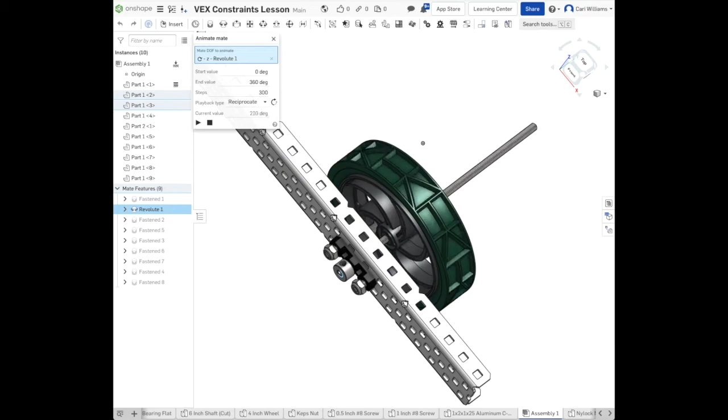Today's lesson is all about constraints, and by the end of the lesson, your goal is to make a wheel that rotates on an axle through the holes of both the bearing flat and the aluminum bar, as shown in this image. All right, let's get started.

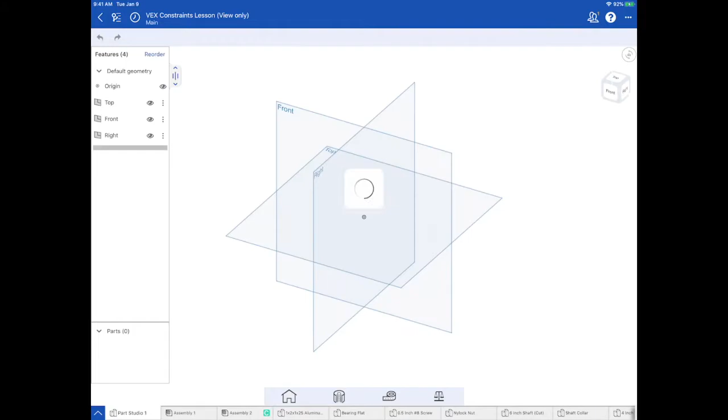In this video, I'm going to show you how to use the OnShape iPad app to do our first lesson on constraints. In your home menu, you'll see everything you've ever created or opened in My OnShape. But in Shared With Me, you'll find the document I've shared with you that has some part files already inserted, as well as an assembly file I made for you to explore. You'll see this is a part studio, which is how we create a part, but we're not going to do that since I've already imported the parts for you. This is an assembly file, and if you look at the bottom tab, you'll see this is where parts are put together.

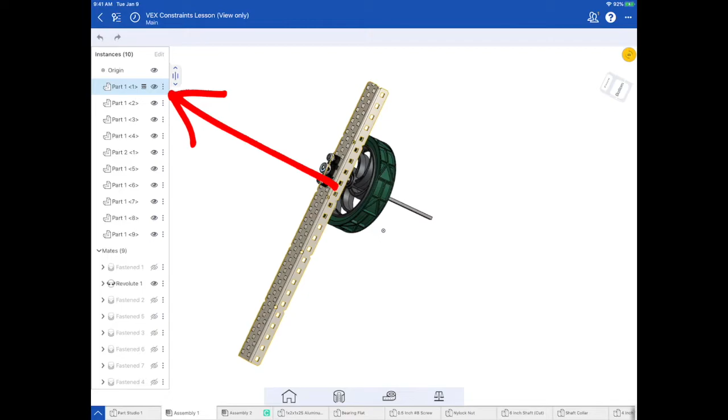Along the left side, you can see each part individually, and when I tap on it, it highlights. If I tap on two, it'll highlight two parts. Watch as I highlight this—that's the drive shaft or axle. Now the next one—that's the outer part of the wheel. The next one is the inner part of the wheel. This one is the shaft collar; let me zoom in so you can see it better. That's on the end of the axle. As I scroll through and highlight each one, I tap it and then tap again to deselect. Sometimes you can select two at a time, so I can highlight one and two and see both parts highlighted together, the screw and the nut.

Below the parts, you'll see the mates. Mates are the way parts are constrained together, meaning basically glued together, or how they interact with one another. As I tap on the mates, you can see which parts are constrained together. Each one has a different name, and I'm going to go through those as we build our lesson one. You can see the two parts constrained together in each of these mates along the left side menu.

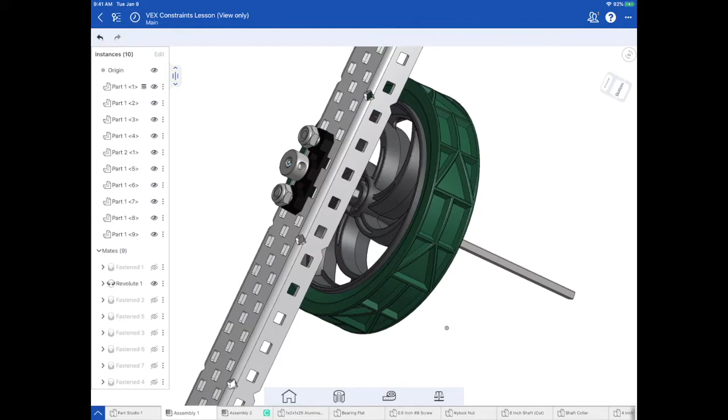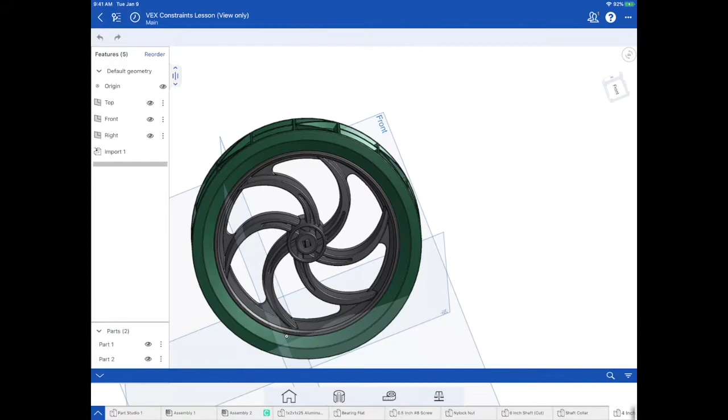One thing I want to point out is this little caret arrow in the bottom left corner. This can expand your files along the bottom of your screen so you can see a preview of the different assembly or part files. Here they've loaded right here—you can see we have an aluminum bar, a bearing flat, a screw, a nut. I'm going to go through these as we build our assembly.

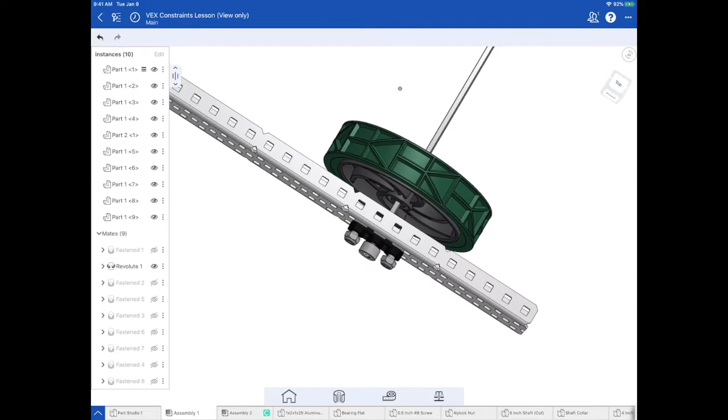To make an assembly, you're going to create a new assembly file that's blank, and try to create what I made in this assembly file that I shared with you. All of the part files have already been imported for you, and since I shared the document, you don't need to import them—they're already here, and you don't need to create them. However, you will insert these part files into an assembly file to make what you see right here.

This shared document is view only, meaning you can't edit anything, so you'll need to make a copy. Tap the little 'i' in the far right, and you'll see there's an option for copy. Now that you've made a copy, you'll name it—you can leave it with the suggested name with 'copy,' or name it something specific for your purposes. Then you'll see this is an editable copy that you can create a new assembly file with.

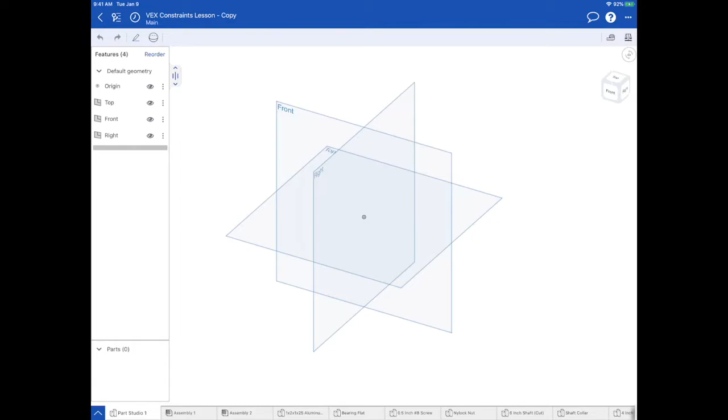To do this, tap that blue caret arrow in the bottom left corner and then tap the plus sign. That will bring up a menu where you can tap Create Assembly.

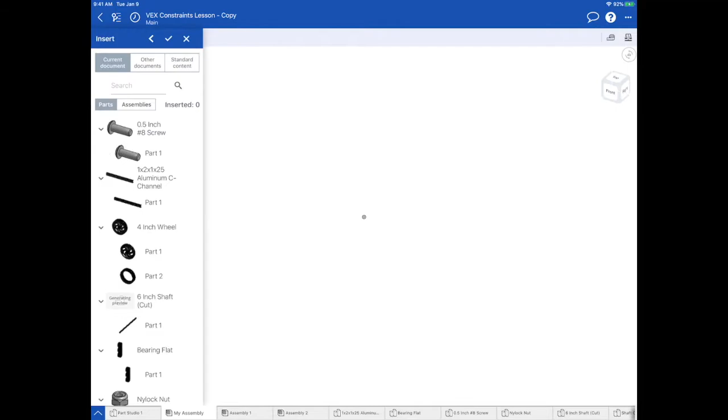Now you have a blank assembly that you can start inserting the different part files into and putting them together. To do this, tap the Insert icon in the top left corner, and a menu will appear where I select which part I want—the first one's going to be this aluminum C channel. Then I tap the check to accept.

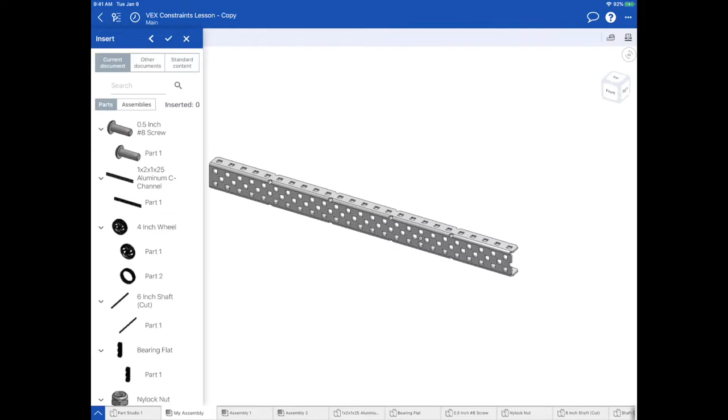Now we're going to insert the second part, which is the bearing flat. We'll go back to the Insert menu at the top left, tap the Insert icon, and select the bearing flat. Then tap the check mark to accept, and you'll see the bearing flat added to the workspace.

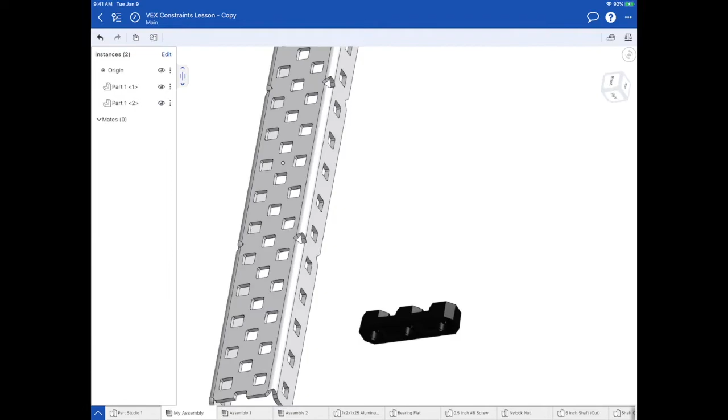Now I'm going to move that bearing flat over a little bit, and you can see we have two different parts here that we want to basically glue together, and we're going to use what's called the fastened mate. There are many different types of constraints found in this features menu up at the top left.

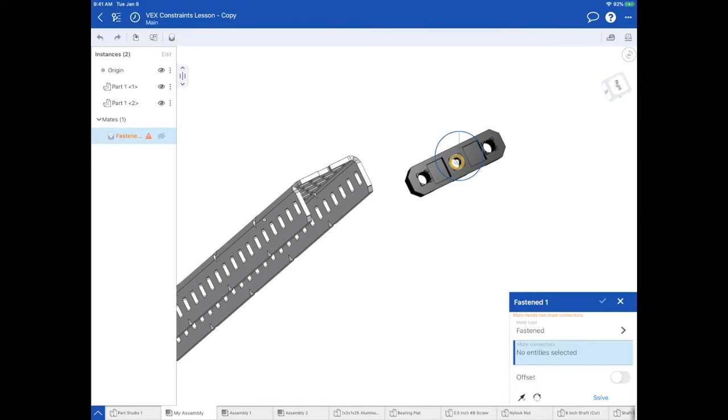So when I tap on the features menu, you will see that we're going to select the fastened mate. The fastened mate basically glues two pieces together so that they may not rotate on an axis. They're stuck together. So when you use the constraints or the different types of mates, you will need to use the selection tool when you're on an iPad. In order to do this, you hold your finger down on the white space and then you drag your finger over to the point on the part that you're trying to select.

Let me share a part of the tutorial number 1 for the iPad that better explains how to use the selection tool that you're seeing on the screen right now. Another important gesture for using OnShape is the precision selector. To select things precisely, you'll want to tap and hold with a single finger. After holding for a moment, you'll see the precision selector appear. While holding your finger down, simply move over the entity that you're trying to select and let go. The precision selector is used throughout OnShape anytime precision selection is needed.

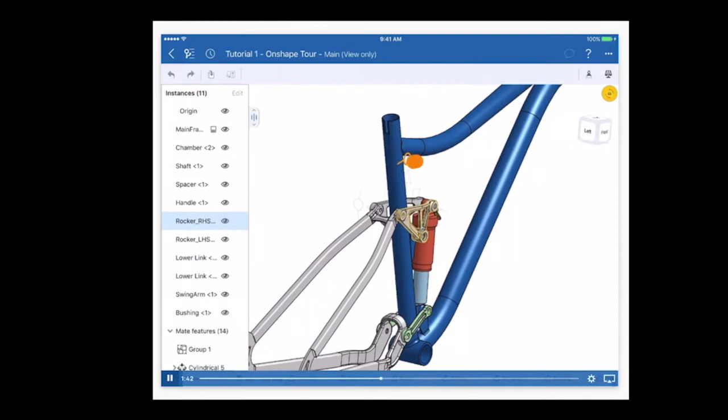One last important gesture when using OnShape Mobile is the double tap. Double tapping the screen with a single finger will deselect any entities that are selected. Don't forget that when too many things get selected, just double tap the white space on your screen with a single finger and it will deselect everything. You're going to need this all the time when using the iPad.

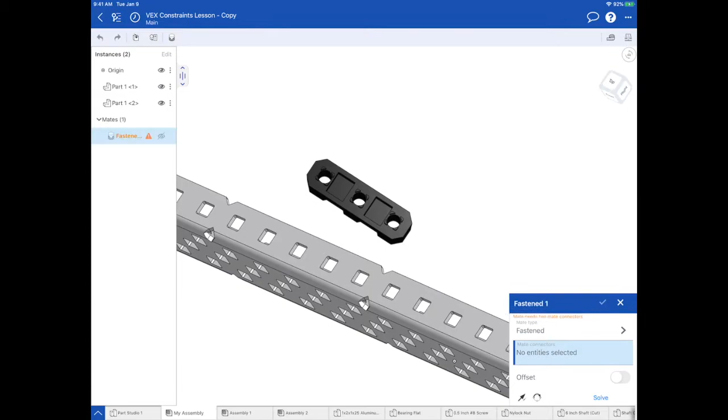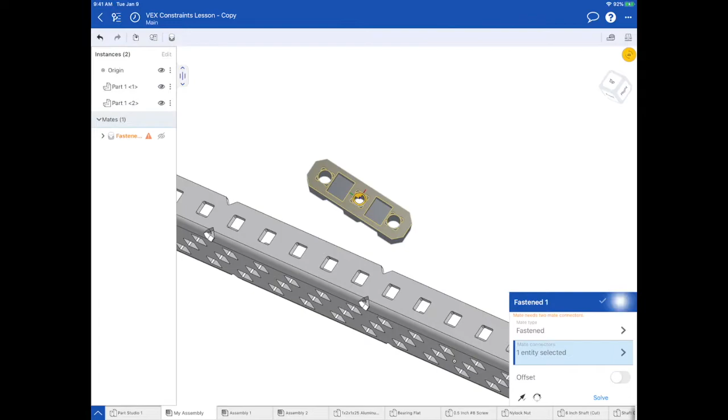Okay, so here we're going to try this again. We're going to the constraints menu and I select the fastened mate. Then I use my selection tool and notice that there's a variety of points I can choose. I'm looking for the top portion of that center circle. Now notice when I select a point, in the properties box for the fastened mate, it says one entity selected. Now one thing I found difficult to do on the iPad when selecting 2 points to mate together is to rotate once that properties box is open.

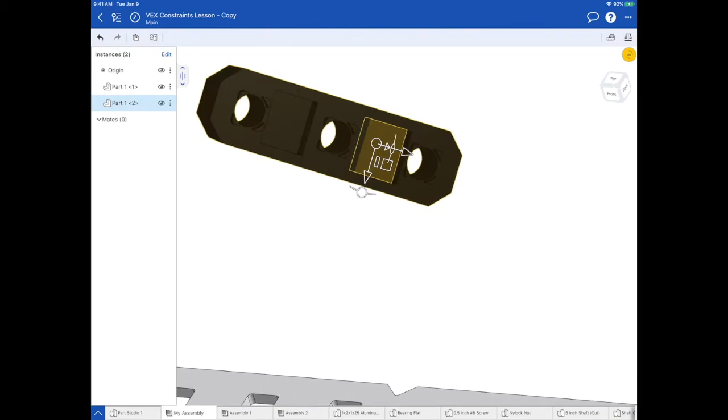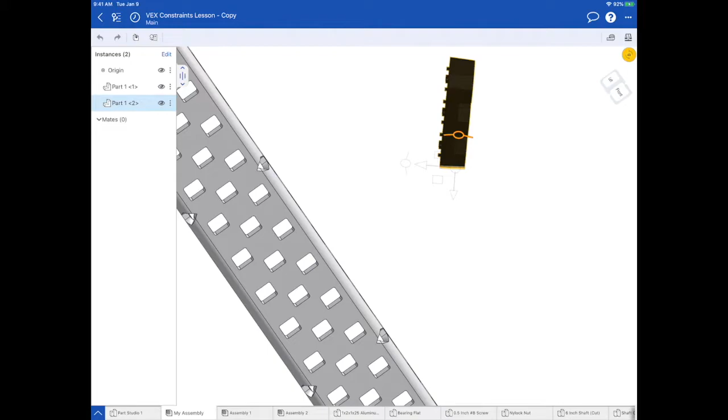So you'll see what I'm doing here is I'm trying to rotate that bearing flat so that the back side is showing as well as the front side of the aluminum bar, which is what I want to fasten it to. So I'm really trying to use those arrows and those little dots at the end of the arrows. That's how you rotate the parts. It takes a little bit of practice to get used to this, but I'm trying to rotate that bearing flat so that the back side is visible as well as the front side of the aluminum bar, because that's what I'm trying to fasten together. So notice it's taking me some time to figure out how to do this, but I'm rotating that bearing flat around so that I can fasten the 2 points together.

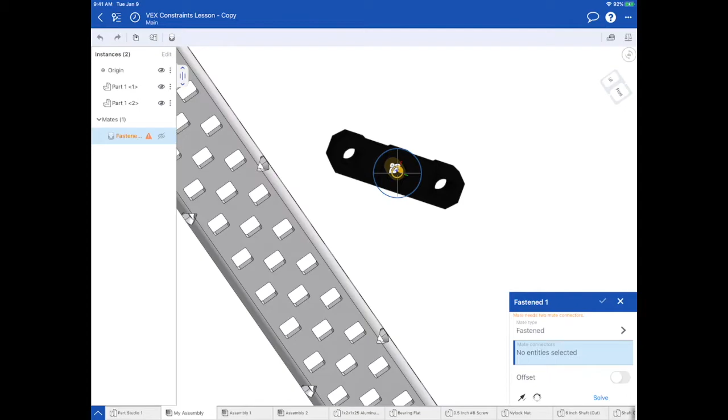So now that I can see the 2 points, I'm going to open that features menu again and click on Fasten Mate. Then I'm going to use my selection tool to select that top side of that circle. Notice there's a bottom and top of the circle. I selected the top of the circle. Now I'm going to the aluminum bar and I'm going to select the circle inside the middle of one of those holes in the aluminum bar.

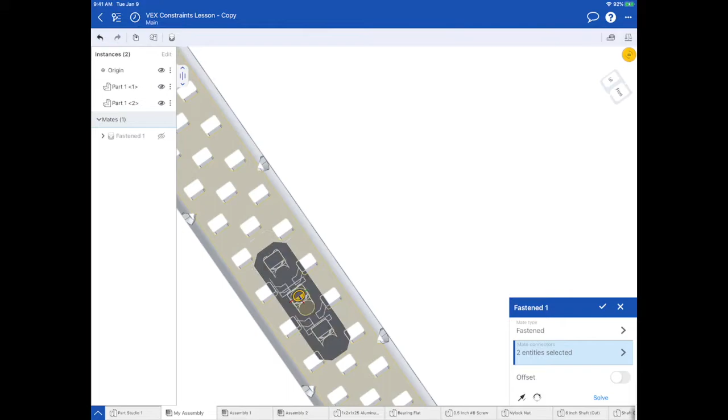Now look at the fastener mate property box. You can see that 2 entities are selected, and there are a couple settings that I like to play with to make sure I have the right rotation and right axes that I've picked. So just click that arrow and that circle at the bottom of the properties box and it will kind of show you the different configurations for those 2 points you've selected. All right, once you think it's right, tap the check mark to accept, and it looks like our bearing flat is now fastened to the aluminum bar.

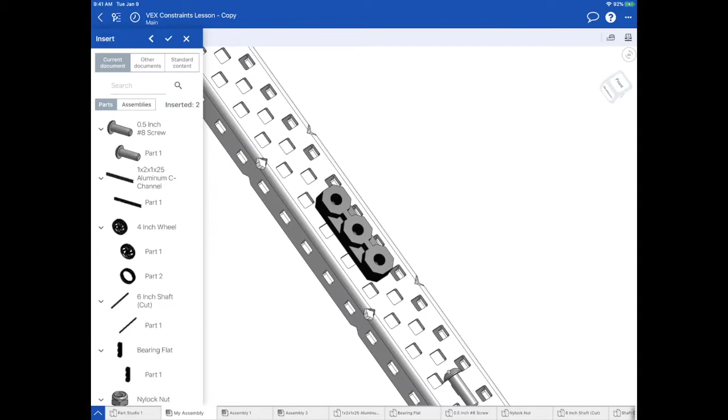Okay, now it's time to insert our next part. You're going to go up to the Insert menu, and then you're going to select a screw. We're going to tap the screw and then tap the check mark at the top to accept, and notice that a screw has been placed in our workspace. It's actually on the aluminum bar. So I'm going to move it off of the aluminum bar so I can see it.

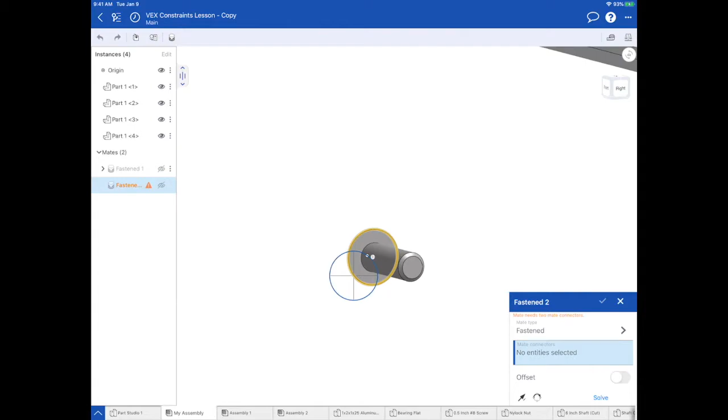And now I'm going to go up to the Features menu to choose the Fastener Mate again. And this time I'm going to use the back side of the head of the screw. So I use the selection tool. And notice once it's highlighted, or there's several selection points, you can tell by those little white dots. Once I found the white dot I want to tap on that.

So I'm selecting that center point of the top head of the screw. Now, I think I can select the center part of the hole of the bearing flat without rotating. If you aren't able to, you're going to have to close out this mate and then redo it. And I have to do that many times to learn this program.

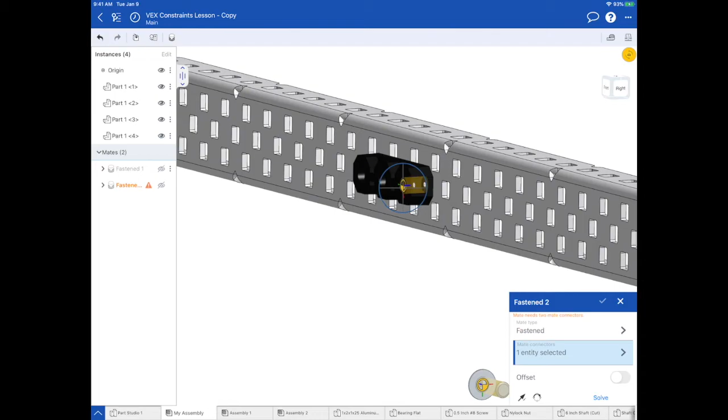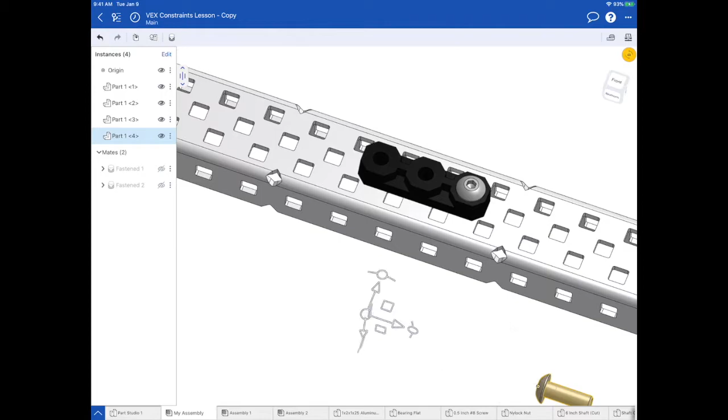So I select the center point of that right hole and I use my little adjustments, the arrow and the circle in the properties menu, and I can see that I want the screw facing that way and I hit accept. Now, one thing that I had to learn is that if it doesn't say in your properties menu that you've selected an entity, then you need to make sure that you do that. So you need to tap on that little white dot to select the entity.

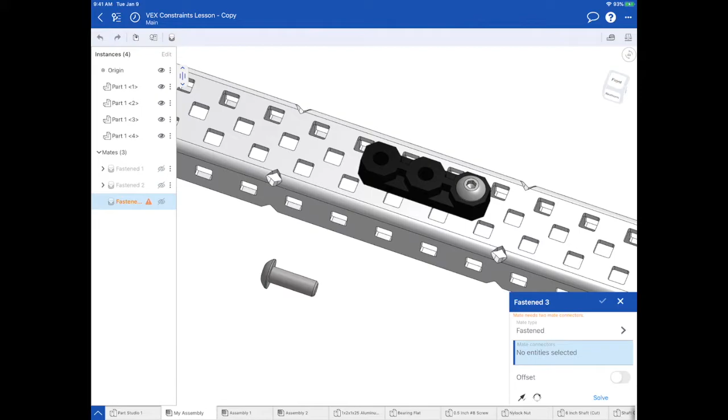Let's try this again. I inserted another screw, and now I'm going to use that fastened mate. So once again, I tap on the features icon and then the fastened mate. And now my properties window opens, so I need to select my first entity. I'm going to use the back of the head of the screw, that center point. So I'm going to use my selection tool, come over, and then tap that little white dot.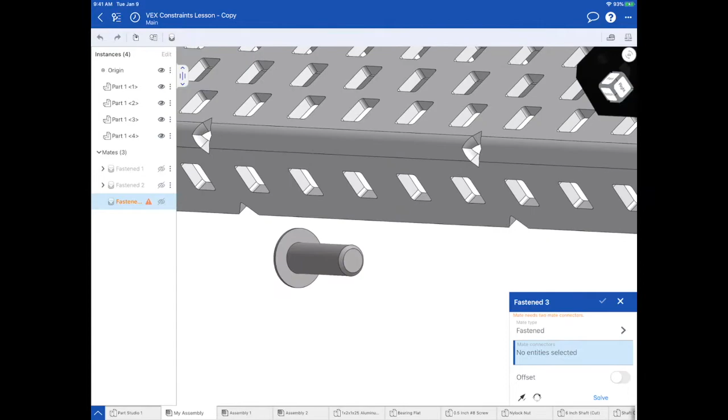Notice it doesn't say any entities are selected yet. I got to make sure I can get it to do that. So I'm going to tap that little white dot in the center. Sometimes zooming in helps. And notice once I select it and I tap on that white dot, it looks a little bit different. And in the properties window, it says one entity selected.

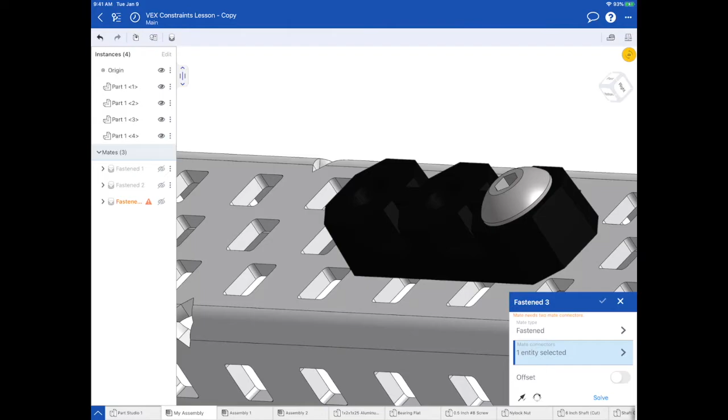Okay, now I'm going to go over to that bearing flat. I want to insert this screw on the far left corner of that bearing flat. I'm going to zoom in and notice I can see the entire hole that's going through, but I'm going to select that top portion. I'm going to tap on that white dot to select that top portion of that hole. The trick is the little white dot, and it took me a while to figure this one out. So here we go, right there in the white dot.

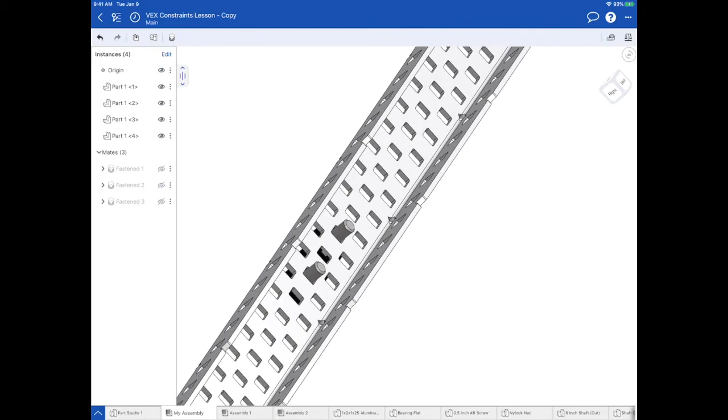Notice it says 2 entities selected. I'm going to make my little adjustments with the arrow, and this is the way I want the screw to point. So I hit the check mark accept. All right, we've got 2 screws going through the bearing flats on either side, which is the way we want it. Now we're going to insert 2 new parts, and they're going to be the nuts that go on the back side of these screws.

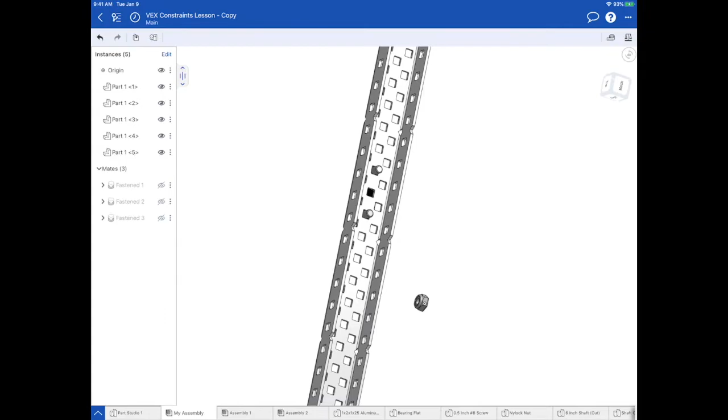Okay, so we're going to go to our insert menu, and then we're going to select what's called a nylock nut to go into the workspace. A nylock nut is a special type of nut that has nylon inserted on one side. The back side is metal, and that's what we're going to attach or fasten to the other piece of metal.

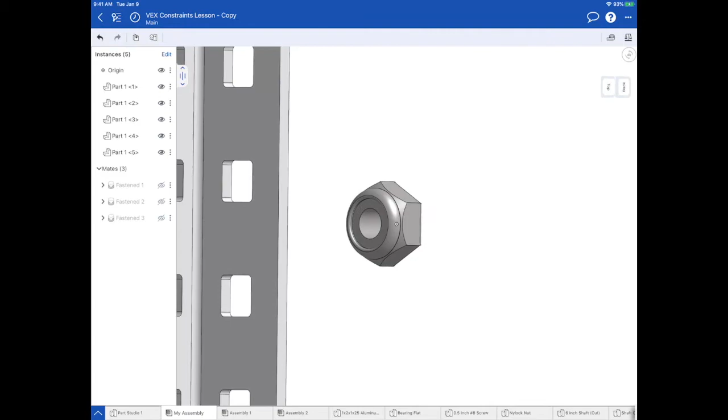But this inner part right here is nylon, so that when a screw enters that nylon area, it locks it in place. They're actually pretty hard to take off of a robot, so I don't suggest building your first robot with these, but we're building a virtual robot so we can easily take them off.

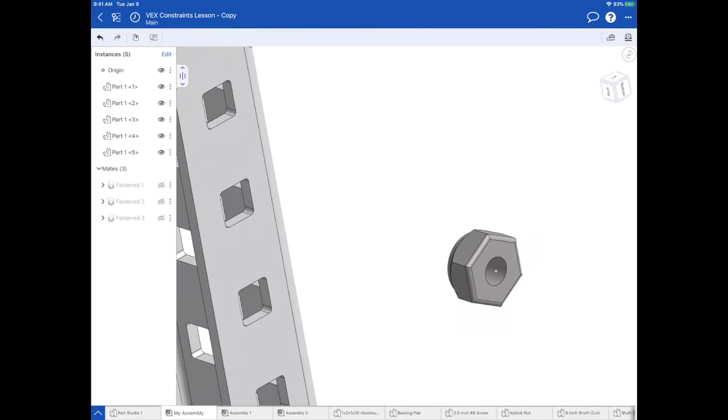Okay, so now I need to fasten this nylock to the screw, and I actually am going to need to rotate it so that I can see the back side of the nylock, this metal side right here, as well as the back side of this screw. So can't see them both right now.

So on an iPad, since this is hard to do, I'm going to rotate that nut using those circle features. And I'm trying to get it so I can see the back side of this nylock nut right there, as well as the side of the screw that I'm trying to fasten it to. So this is a pretty good place.

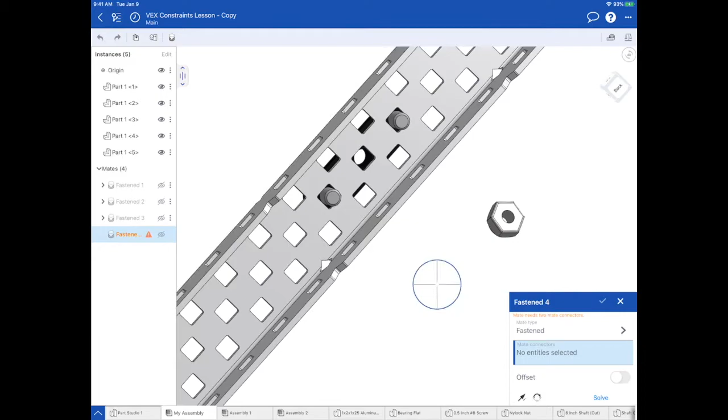So I'm going to use the features menu to open the fastened mate, and I'm going to select that center point on the back of the nylock nut. So look for that white dot and hit select. Check your properties window. It says 1 entity selected. So now I'm going to choose my second point. I'm going to use the center point of the screw.

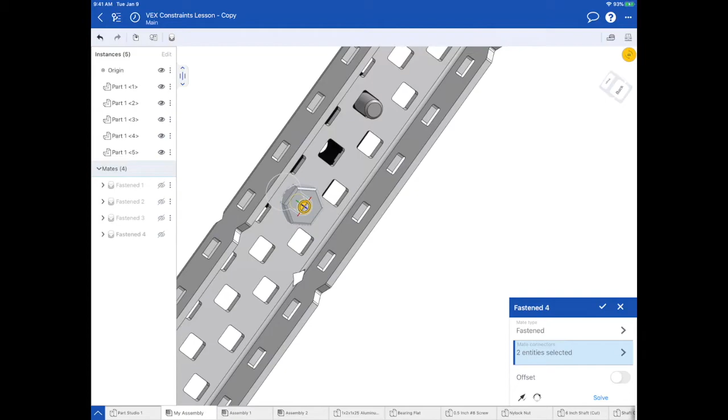Now notice that it says 2 entities selected, and that's a good thing. But my nylock is not actually going the way I want it to. So there's a couple ways to adjust this. One, I should have chosen the center point on the nylon side to then go flush with the backside end of the screw. The other way is to change an offset.

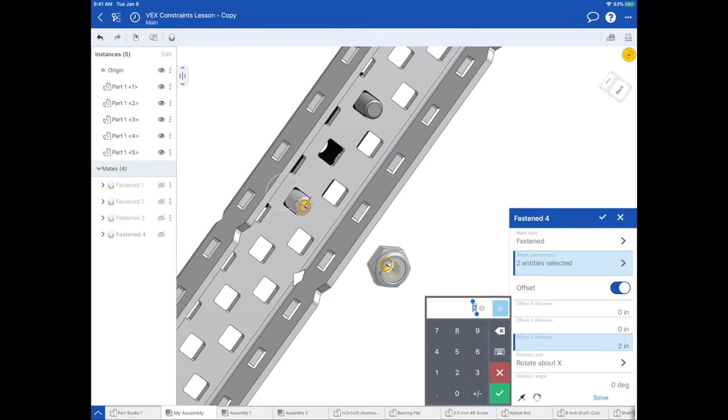So there's an offset setting in the properties menu, and I can adjust any part along the X, Y, or Z axis. And you just kind of use the calculator to see which amount you would like to adjust the axes.

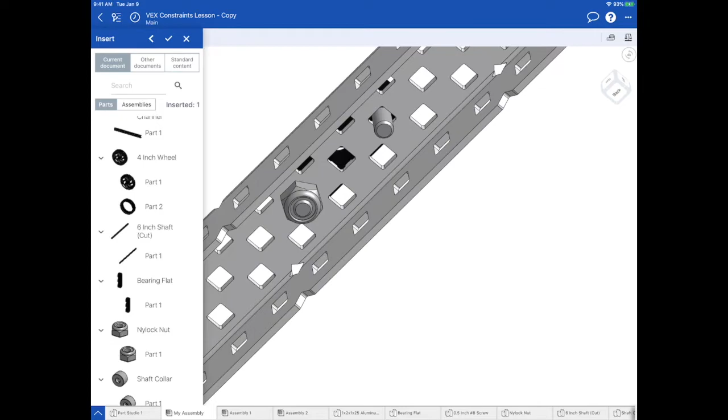And so on this one, I adjusted the Z axis to make that nylock nut go flush with the metal bar. But really, I could have done a different selection order and fixed this from the very start. So I'm going to insert another nylock nut. Let's try this again. So I'm going to rotate and move that nylock so that I can see the side of the nylock nut that I want to select.

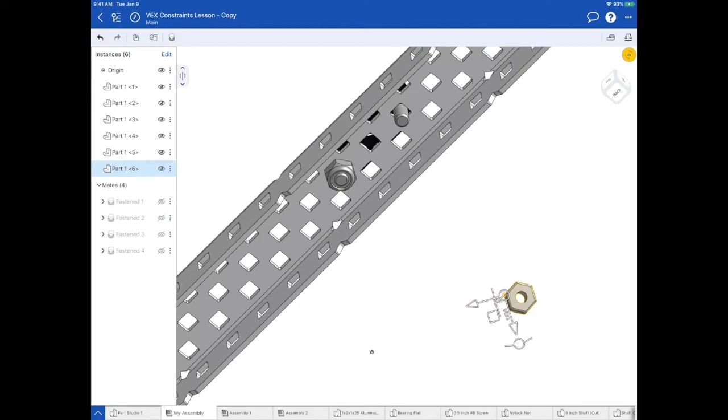And honestly, you should be choosing the center top hole of the nylon side this time instead of the back side, which it looks like I'm probably going to try here again. Then I won't have to use that offset. So here I'm rotating to the side that I thought I was going to use, but I would actually turn it over and use the nylock side. And then I get my fastener mate open in the features window. I need to move this whole thing over so I can use my selection tool.

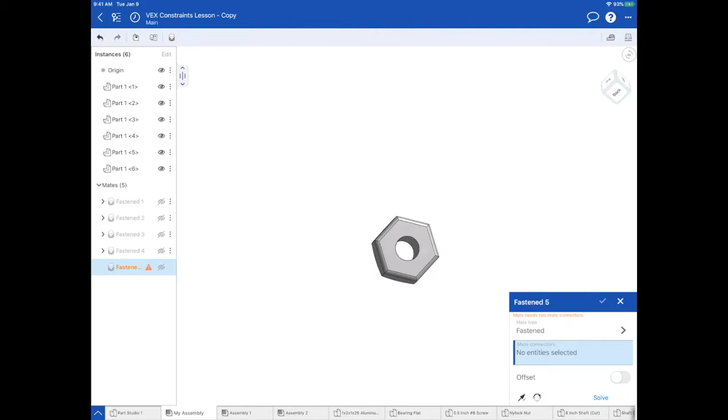And so notice I'm choosing here's the top hole. You should either use the other side of the nylock nut or just go down to the bottom of that hole. And here again, I'm going to do the same thing where I select the center point of the screw, and it's going to do the same thing once again. It's going to put it on backwards, but really you'll get used to doing this.

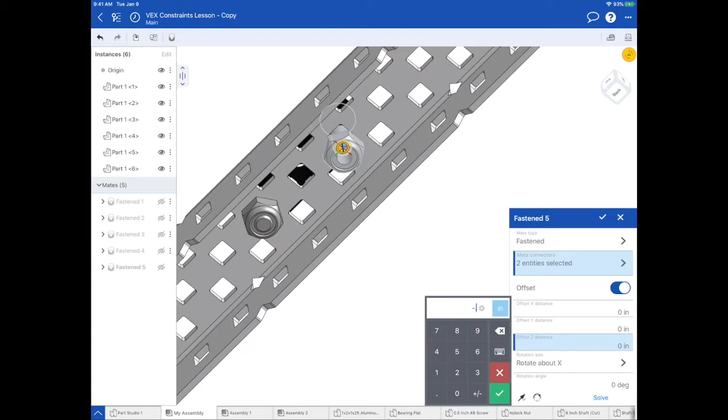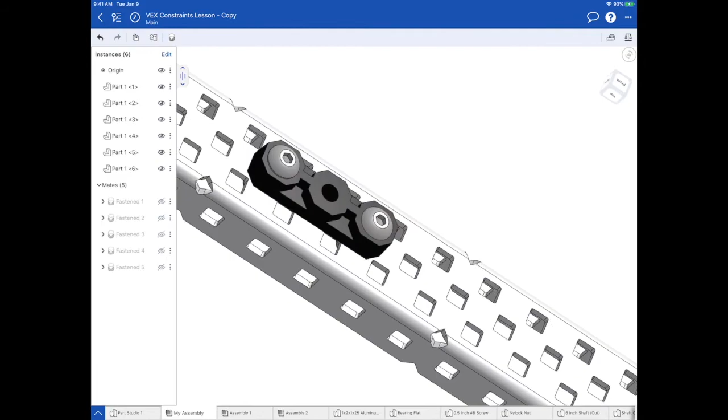I'm going to use the offset again in the Z to offset this about -0.2 inches. You can see it moves it the wrong direction. I'm going to open up that offset again, and I'm going to change it to a +0.2. And then it puts it exactly where I want. You can avoid the whole offset just by selecting the other side of the hole of the nylock nut. It'll be a whole lot easier to do it that way. But it looks like now we have 2 screws with 2 nuts holding that bearing flat in place. Everything's fastened together and it's looking good.

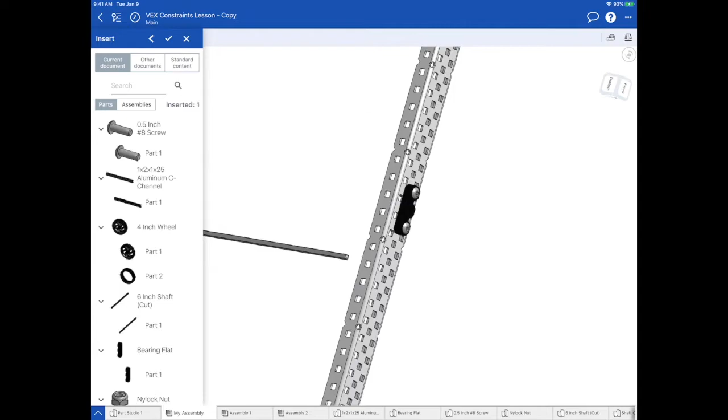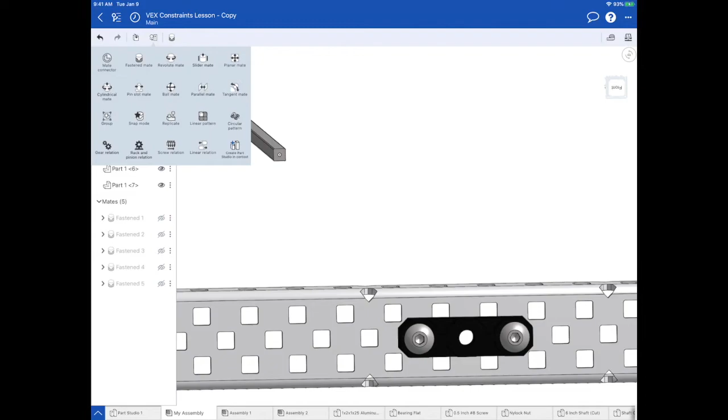Okay, now it's time to insert our next part. We're going to go back to that insert menu, and we're going to insert the drive shaft, or what's also called an axle. And we're going to place that in our workspace by tapping the check mark for accept. And now we have this axle, and the axle is going to go through the center hole of that bearing flat. However, we're not going to fasten it because we want it actually to revolve and move and turn when the wheel turns. So this time we're going to go back to the features menu, and we're not going to choose the fastener mate. This time we're going to select the revolute mate. It's right to the right of the fastener mate.

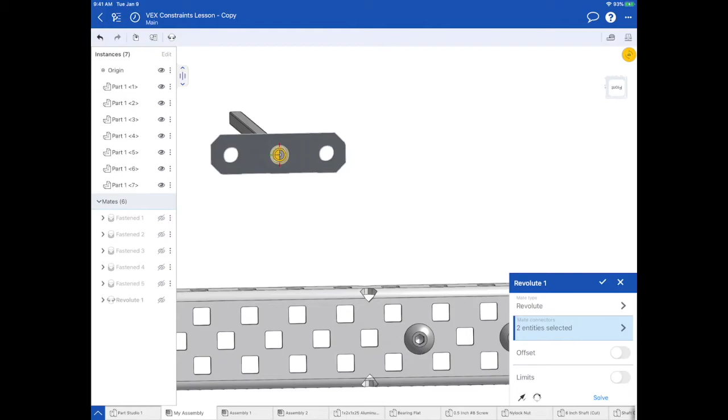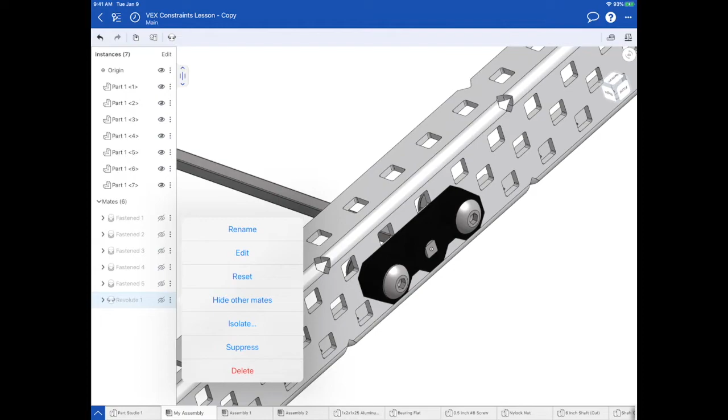Okay, so now I'm going to select the center point of the axle or the shaft. Notice it says one entity selected. I come over to the center point hole of my bearing flat and I select it. Now it looks like the bearing flat moved, but it was just temporary. So once I hit that check mark, accept, you can see that the axle is going through the center hole of the bearing flat. So everything looks right, except for I want that axle to be offset. So I'm going to reopen that properties window by simply just tapping on the 3 dots next to that type of mate in the left menu, and then I can start working on the offsets.

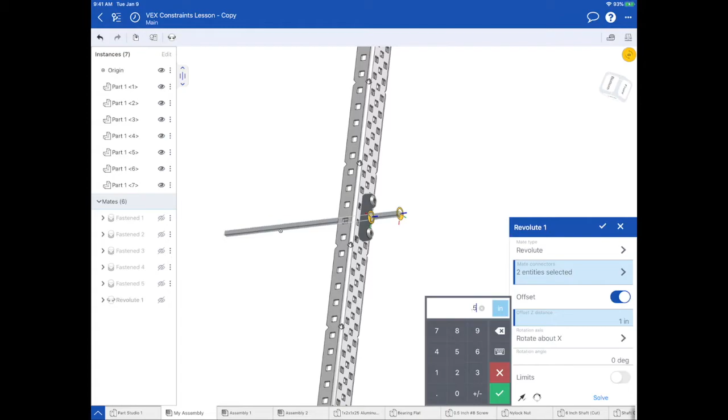Now notice in the revolute mate, there's only one axis that we can offset because we're rotating on the x-axis. So I'm going to offset 2 inches on that x-axis, and that looks like it's a little too long. So I'm going to adjust that to 1 inch. It still looks a little bit long. So I'm going to adjust it to 0.5, and that looks perfect to add what we're going to call a shaft collar to the end. So your x-axis should be offset at 0.5 inches. That's enough to put a shaft collar on the end and a wheel on the other side.

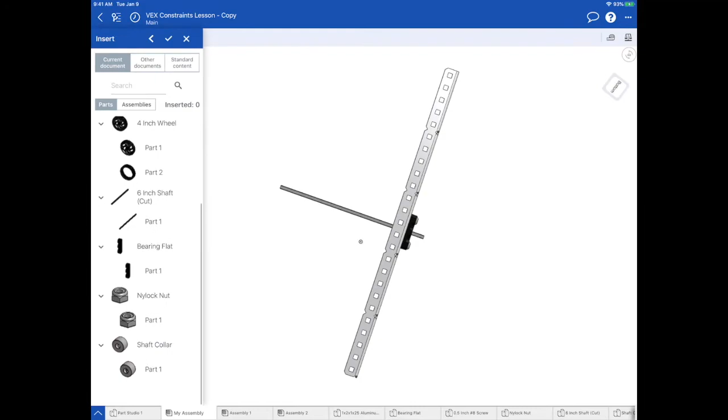Okay, so now we're going to go back to the insert menu, and it's time to insert the shaft collar that I was just talking about. So we're going to tap that check mark to accept, and the shaft collar is added to our workspace. Now there's a little tiny hole in that shaft collar. Normally a little screw goes in there that tightens down on the shaft or the axle. We're going to leave that out. It's a bit too complicated for our virtual robots.

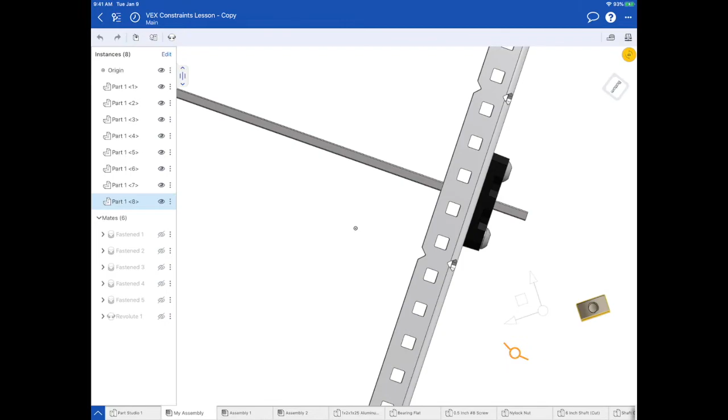Okay, so I'm going to try to rotate this shaft collar so I can see the hole in the center as well as the center point on the axle at the same time, since once we open that properties window, we're not able to make these adjustments on the iPad. So here we go. I make my rotation, a little bit more there, perfect. I'm going to go to the features menu, and we're going to use the fastener mate again.

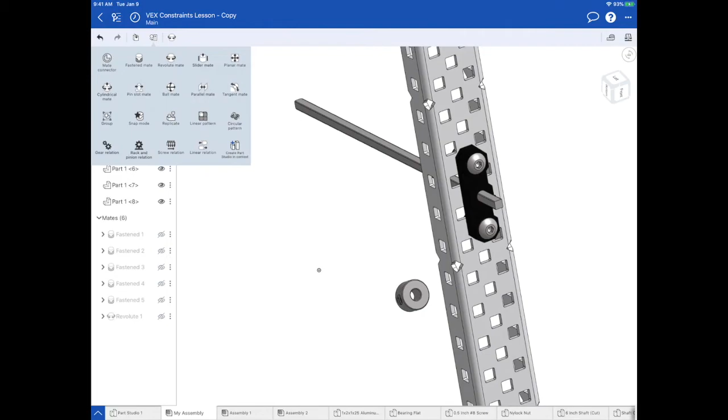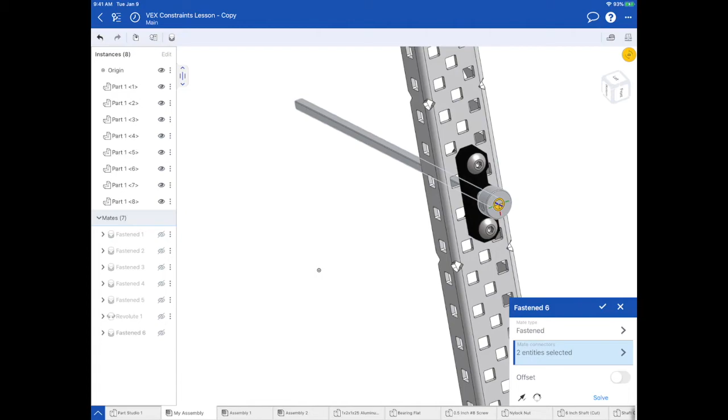Select the fastened mate, and then I'm going to look for the center point of that shaft collar hole and hit select, or that little white dot to select the entity. Now I'm going to go over to the axle, and again also hit the center point of the axle or the shaft. I make my little adjustments with the arrow and the rotate in the bottom left corner of my properties window. And if you need to offset it, you can.

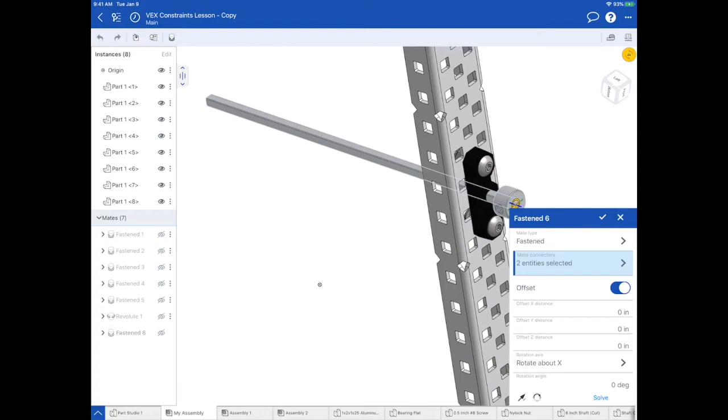Usually our shaft collars go flush up against the bearing flat. So I'm going to actually reopen that fastened property window. I'm going to go to the offset, and I'm going to kind of play around with which axis that is. I think it's the X because that's what the axle's on. And I just offset it a tiny bit so that it goes closer to the bearing flat. And that is what it looks like when you build a real robot.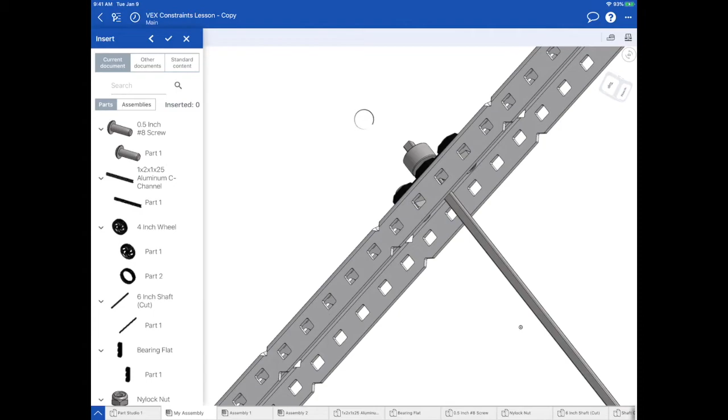Okay, it's time to put on the wheel. So you're going to go back to the insert menu, and you're going to select the 4-inch wheel, and you're going to hit the check mark to accept. I'm going to move this wheel off of the other parts of the assembly here, and notice that the wheel comes in 2 parts. So we actually have to fasten the wheel together in order to make it one piece.

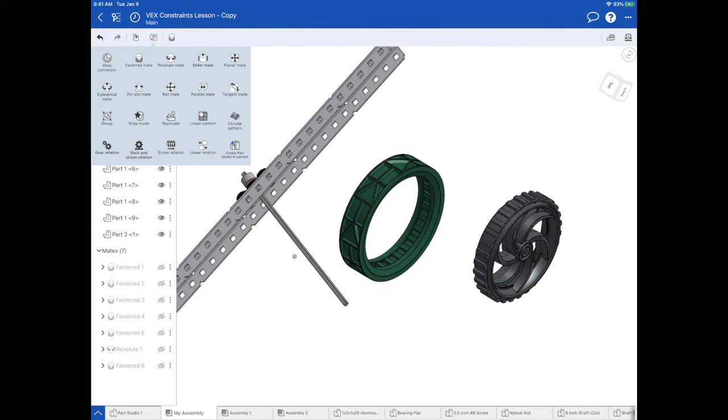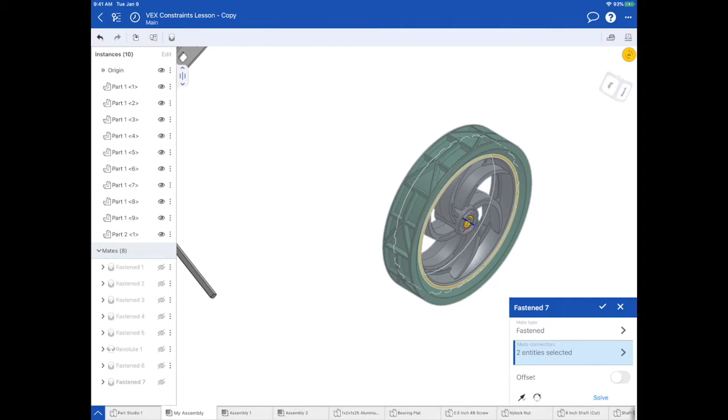So we're going to start by opening the features menu to fasten this inner circle right here on the rubber part of the wheel to a similar circle on the inner part of the wheel. So I'm going to zoom in a little bit. You'll see I'll use my selection tool. This line right here looks right. So I'm going to tap that white dot to select the second entity and check mark to accept. So now our wheel is in one piece.

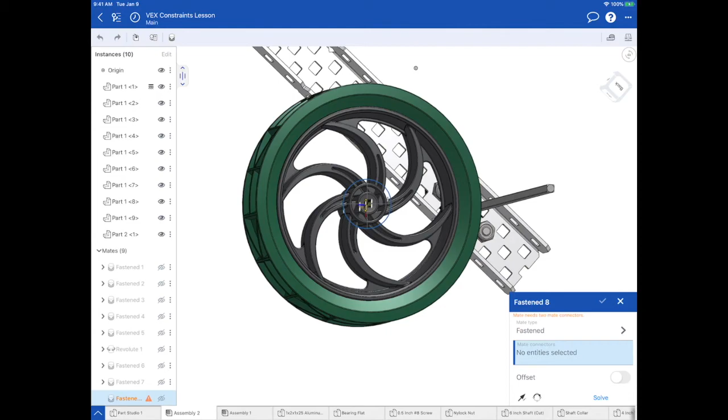Okay, so now when I select the square hole in the center of the wheel, it will move both parts onto the axle. Now I found when I was trying to mate this wheel onto the axle that the center points didn't work the way I thought they would. So we're actually going to use a line in the middle of this square hole. Since it's a square and it goes all the way through the wheel, there's a line on the edge of that square hole that we're going to use to select. And so here I'm going to use my selection tool, and there we go. I see the line. I'm going to tap that white dot to select it.

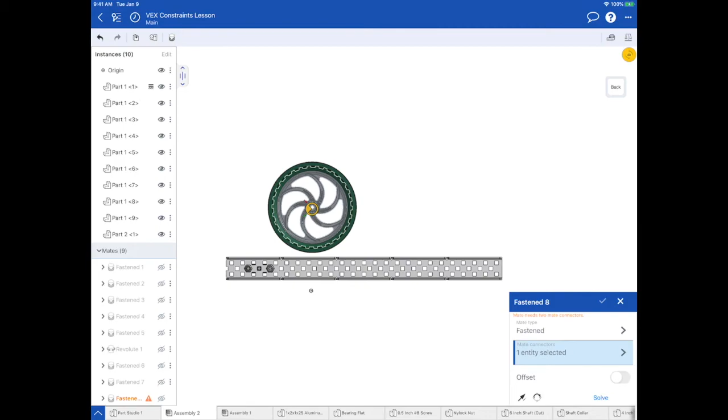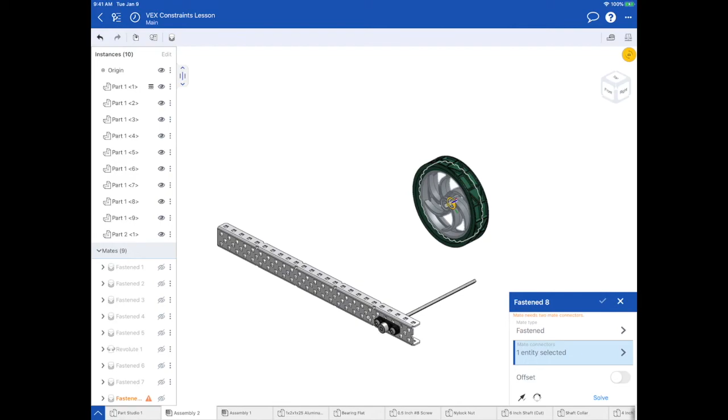And now I'm going to go to my axle, and I have found that you can go to the 3D cube in the right corner and select a different view. So if you want to rotate it while that property window is open, this is the way you can do it. You can't use your two fingers to do it, but you can use the menu on the 3D cube. So I rotate it around so that I can find the exact line on the axle that I want to use. I actually use the dimetric view and then zoomed in so I could use that line on the edge of the axle, and I'm going to use that center point because that's where I want the wheel to go.

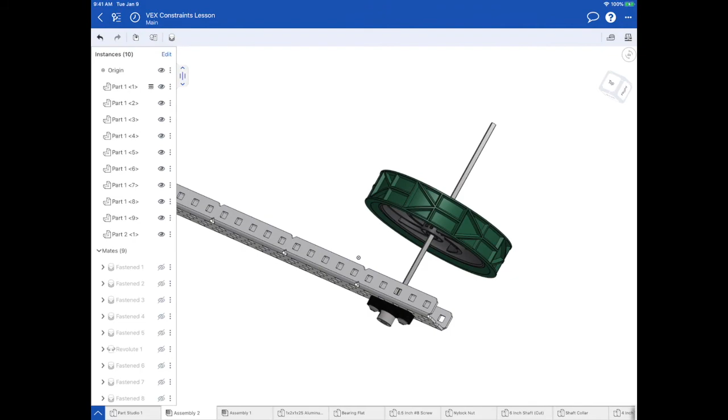And when I hit accept, the wheel perfectly goes onto that line because the two lines I selected glue together where it fits perfect. Now, you might have to make some adjustments with offsets or learn to figure out which lines are the perfect lines to go together. But you will eventually figure this out as you play and practice with OnShape more. So the only thing I need to do is offset this wheel so that it's closer to the aluminum bar.

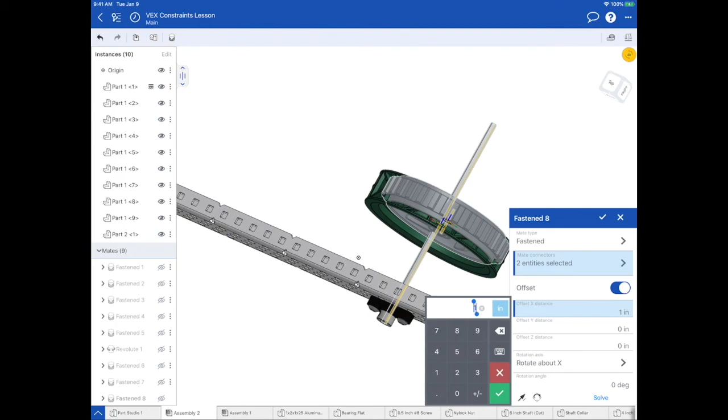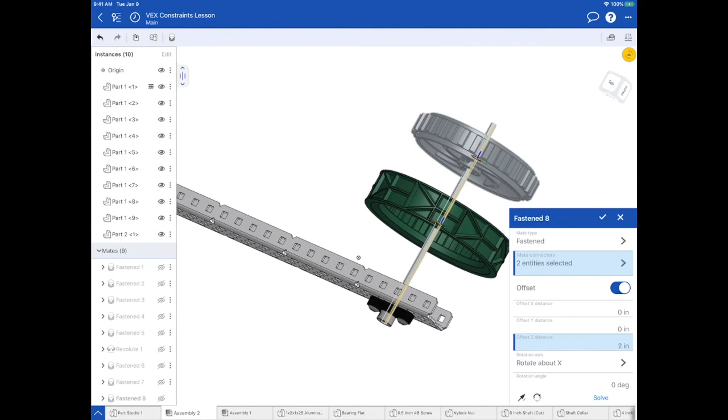And I'm actually going to reopen my properties window, and I'm going to first adjust this x-axis, and I realize that's not the right axis. So I'm going to delete that, and I'm going to try the z-axis instead. The z-axis, I find, will move that wheel up or down on the axle. And so I start with 2, and it's going the wrong way, so I know I need a negative sign to make it go the other way. And a 2 is too far, so I'm going to try -1 inch. And let's see what that looks like. And it's exactly where I want it. So I offset the z by -1, and this is my final product.

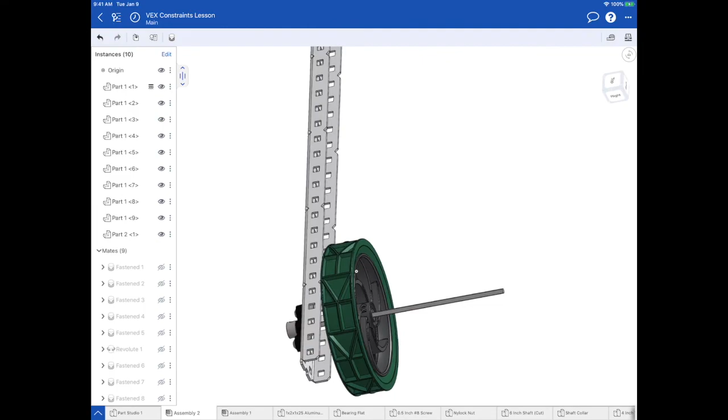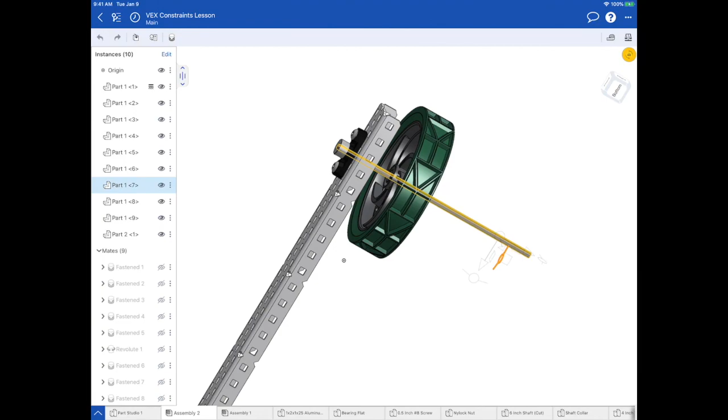All right, we have reached the end of the lesson. The one thing that you can test on an iPad for the Revolute Mate is I can select that axle and rotate it, and notice that even though nothing moves, I can still move the axle, which then rotates the wheel. So this is how I could test that my assembly was made the way it was intended to. All right, that's it. Congratulations, you did it. That's the end of the constraints lesson for VEX using an iPad.